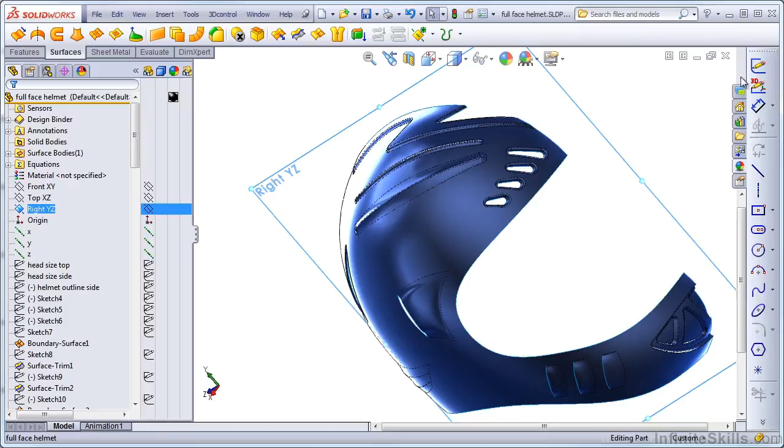Let's start by creating a sketch on the right plane. On this plane, I'm just going to sketch an arc that starts and ends on the opening for the mask. I'll give it a little bit of curvature, then extrude this as a reference surface in this direction.

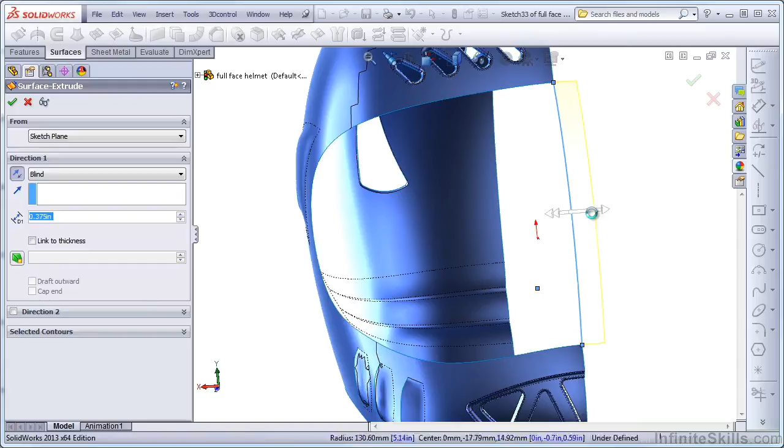The next thing I want to do is define the curvature in the other direction along the middle. I'm going to start with a 3D sketch and just place a couple of sketch points. The first sketch point I want to place is right here, and then the second one right about here.

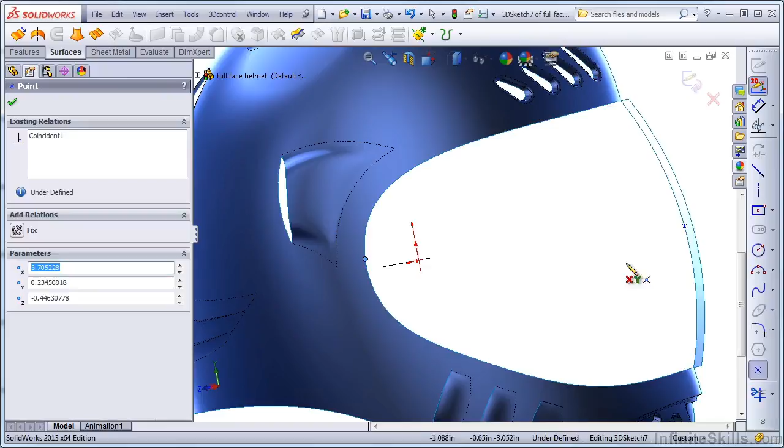This will help me create a plane that I can sketch on, so let's make a plane using these 2 points - point there, point here. And I want this plane to be perpendicular to the right plane.

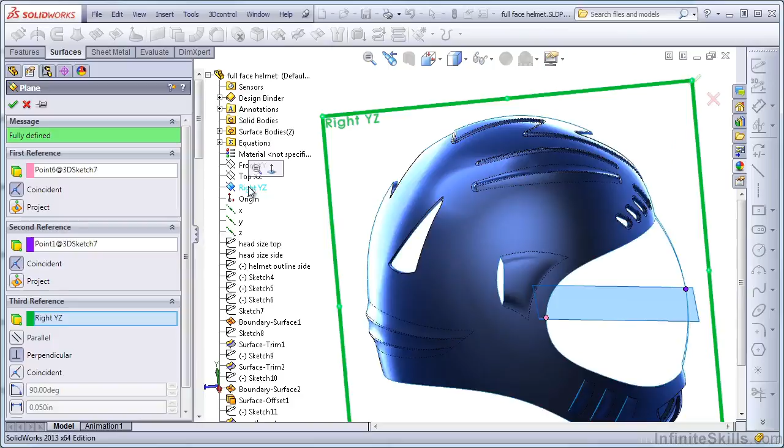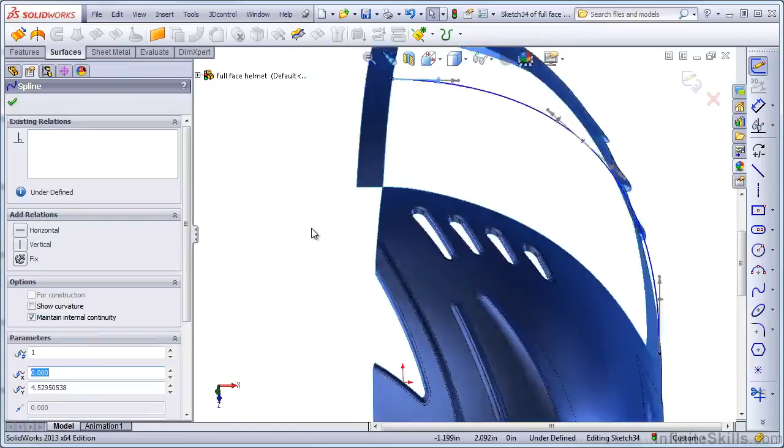Now I can add in a spline on this new plane that ends here. Put a point out here, put that on the other point. Now I need to make sure that the handle for this is going to be horizontal. Give this the right bulge. Maybe that's a little too much.

Now the main surface of the mask is going to be created with a fill surface because I don't have a really good way to make a four-sided surface. The fill surface is the best way to approach a surface that you can't create in a four-sided way.

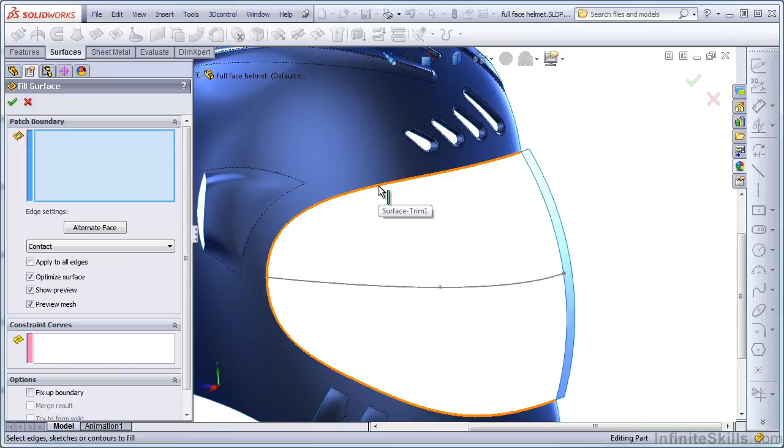So I'll select that edge, and that has no constraint on it at all. Then I'll select this edge, which needs to be tangent. So I'll tell that one to be tangent.

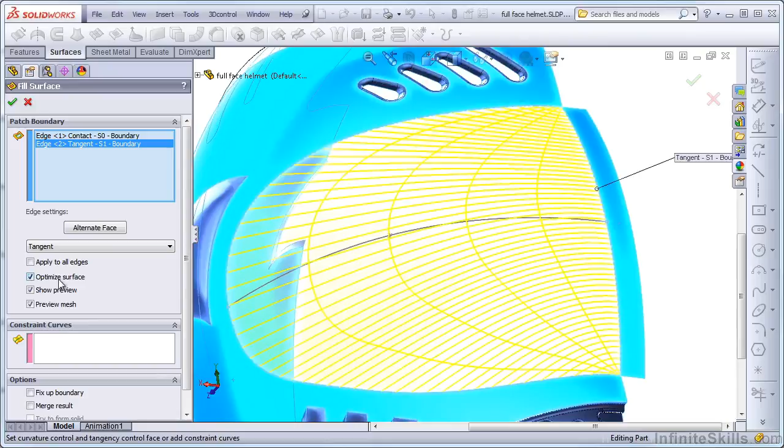Also, the fill surface in this case is trying to create two degenerate points at the ends, and it does that because the optimized surface option is turned on. If I turn this off, then SOLIDWORKS will just fit it in there however it can with a four-sided surface.

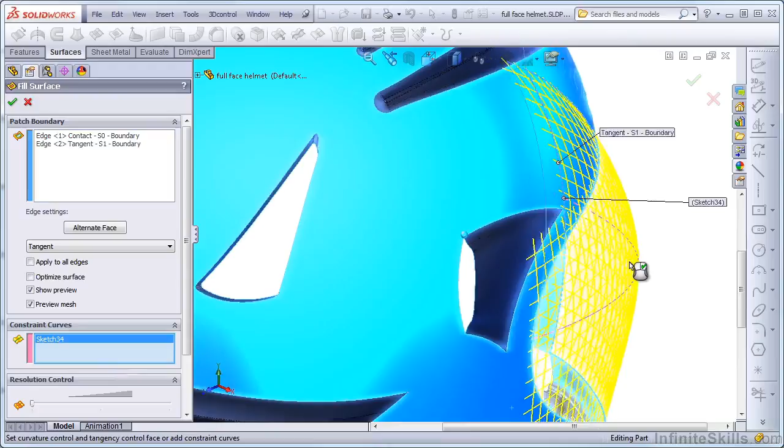Now notice that it's not fitting to this other curve that I added, so I'll select in the constraint curves and click on this spline that I added. And this should work for the mask for the helmet.

In order to make this body transparent, I can go back to the top, find the surface bodies, and just click in the transparency column.

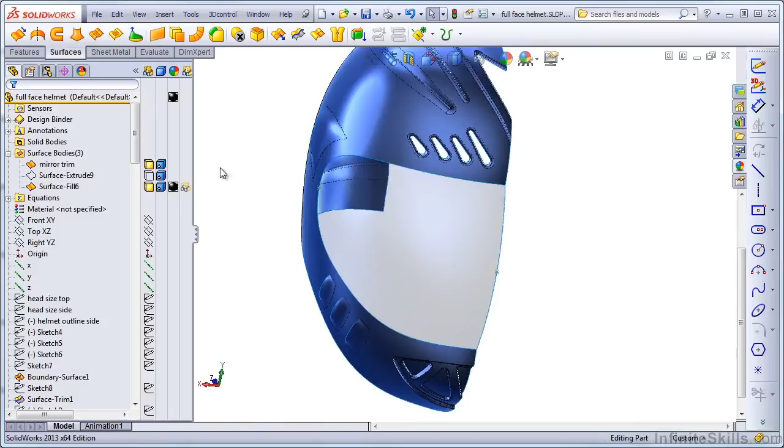And I can also turn off the reference surface that I created. While we're at it, let's hide this sketch point, and the other one goes along with it. So now when I mirror the helmet, I'll just mirror the face cover along with it.

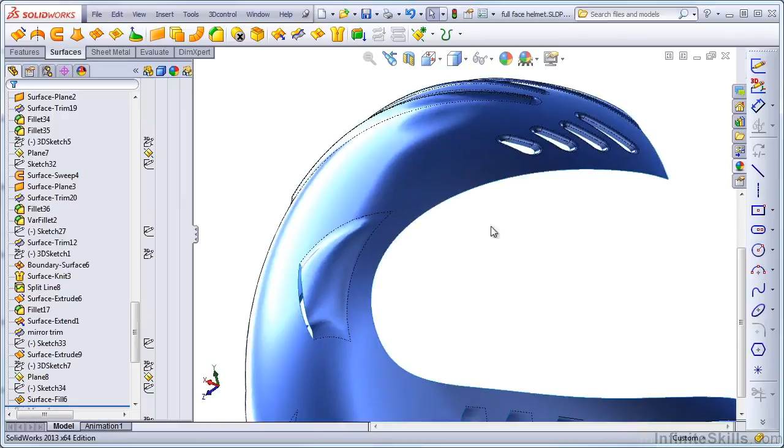Now there's one other thing that I want to create, and I'm going to hide this in order to create it. I want to create a little bit of a lip that goes around the inside of the helmet for this face shield to seat into.

And the best way to do this is going to be using a ruled surface. This will go a lot faster than you're imagining. So I'm going to use the ruled surface with the normal to surface option.

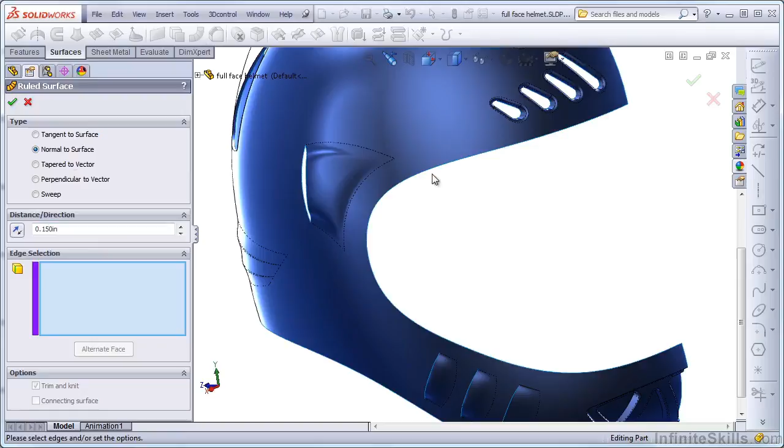Give this a distance of 0.15 inch, and I'm just going to select this edge. You can see it's going to the inside, and that's great. That's where it should go.

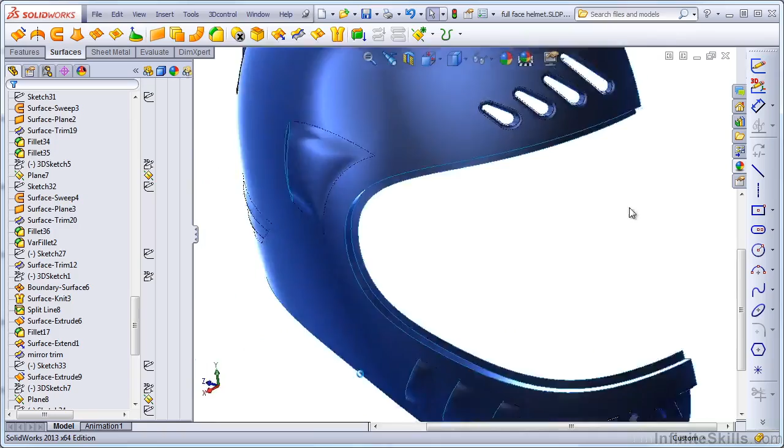And then I'll press enter to repeat the last command. Select the edge created by the previous feature and use the same exact settings and click the green check. So now we've created this seat that goes around the inside of the shield area.

What I'll need to do from here is to knit everything together, select the main surface, select the first ruled surface, and then the second ruled surface, and right-click to accept. Mind the gap.

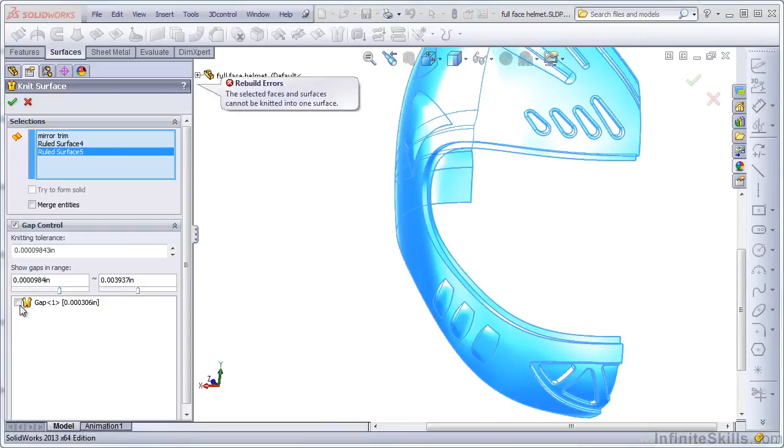Now let's show the face shield and do the mirror. We'll switch back to the Features tab, Mirror, make sure we're mirroring bodies, select the right plane to mirror everything, and the bodies to mirror should only be two.

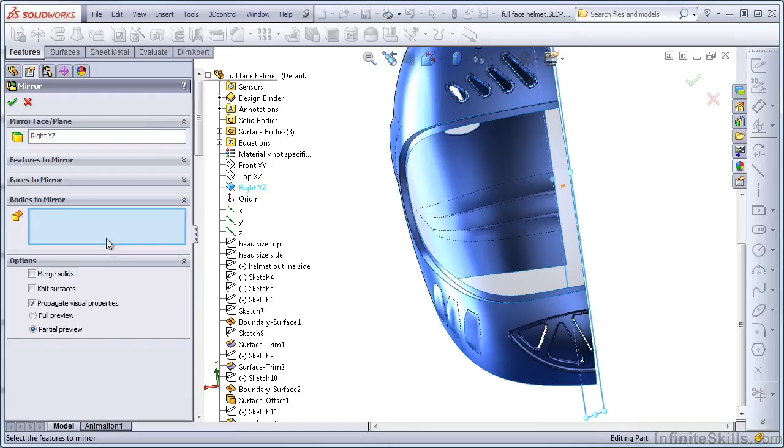And we'll select the face shield and the main helmet body. When we say knit surfaces, it will knit the right half to the left half of the shield and the right half to the left half of the main helmet.

So with this, we wind up with 3 surface bodies, one of which is hidden. It's common practice to actually delete any reference bodies at the end of the tree. So the way to do that is just click on it in the bodies folder, press delete on the keyboard, and say OK.

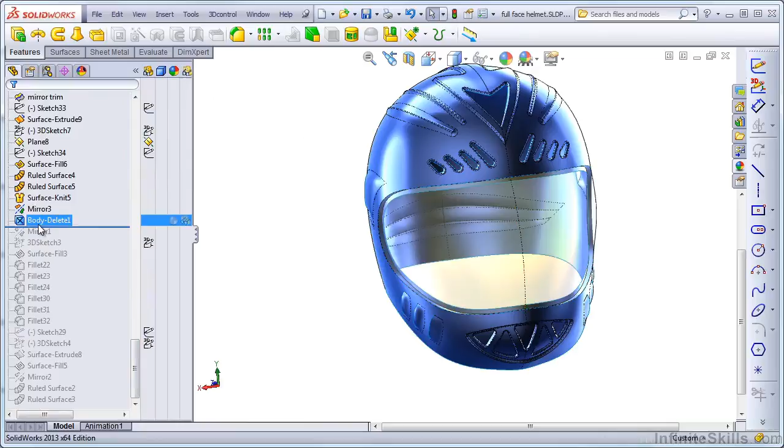Now, that's not really deleted. It just adds a feature in the tree called deleted. If you roll back before that, that body is still there. But here's the helmet that we've created in this series of lessons. Congratulations, you've done a great job, and you've learned quite a lot of surfacing.